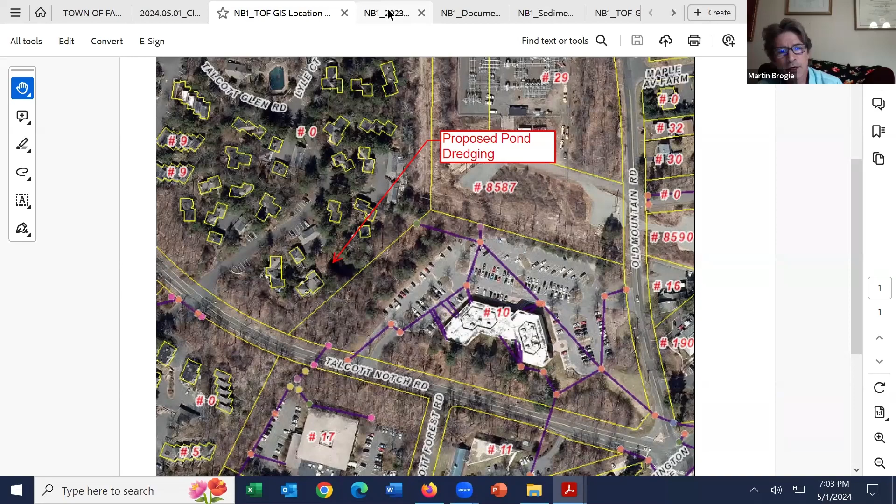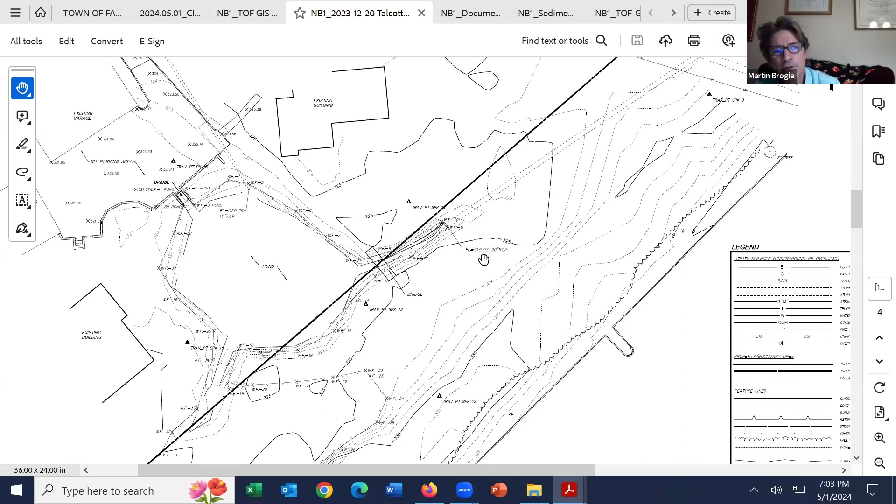And there's been some flooding issues out here, flooding up against a garage to the west, damaged some cars and so forth. Our engineer, Will Walter from Benesch, thinks it's probably an outlet problem. The 30-inch discharge pipe there may have an issue. But the first order of business is to get the pond dredged and to open up the beginning of the outlet culvert at the northeast corner of the pond, and remove the sediment, open up that channel and get things flowing the way that they were designed to. The invert of that 30-inch discharge pipe is not far below the elevation of the pavement in and around the garages. And a little bit of backup there can create that flooding problem.

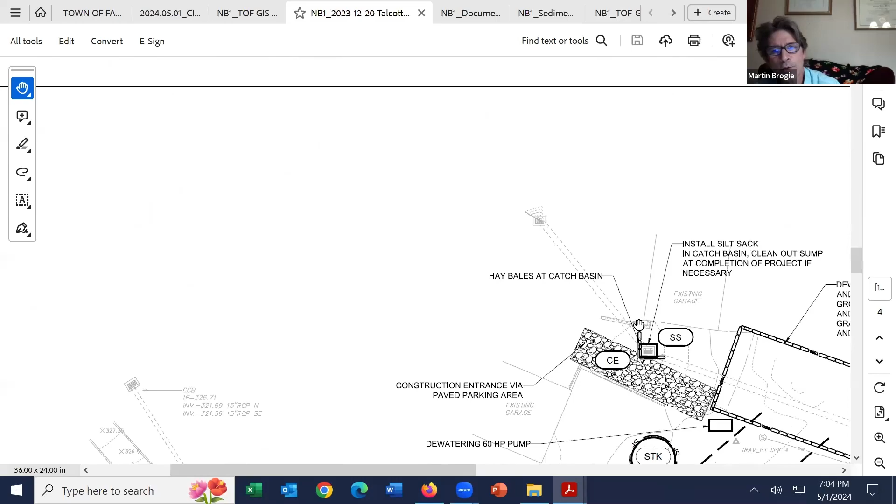So we have Pristine Waters on board. I'm not sure if Mark Aimler's here. He did a pretty extensive presentation last time about how the system would work, including using basically a pumping system that would deliver the sediment to a dewatering bag about 150 feet northeast of the pond in a staging area. That bag would dewater into a containment system, and then the water would get pumped back into the pond as they pump the sediment out. There were some comments from staff as to whether or not that containment system would be large enough given the volume of sediment, but the sediment is actually quite fluffy, as Mark explained, and it will settle down and meet that volume.

And so the plan is to get this done in a low water time, perhaps in July or August, and be very minimally impactful to the pond. Everything is away from the pond other than the inlet hose and the outlet hose, and a small charging barge that would float in the pond to prime the pumps and so forth to keep the suction moving. And then the hoses would be removed. And then the plan is to either reuse the sediment on site, should it be suitable, or dispose of it off-site.

Bruce Sear mentioned to me in the last week or so an issue, and that is the environmental quality of the potential sediment removed from that pond, given the fact that it's received stormwater for a number of years. And certainly it's not uncommon. I've done quite a few dam removal projects where we've worked with DEP and other agencies to evaluate the quality of the sediment to determine whether or not it's suitable for on-site reuse or for disposal off-site. So that's something that wasn't specifically scoped out previously, but we are now planning. I let the client know that we're going to need to do a laboratory analysis of the sediment.

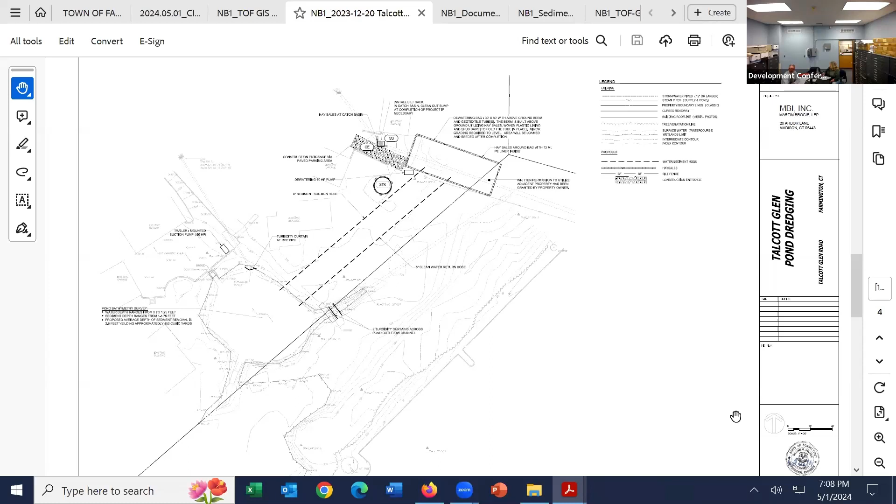Okay, Robert Eisner. Again, did we lose Robert? Yeah, no, he's there. Yeah, I'm still here. All right, gotcha. Can you hear me? Yes, yep. Okay. Do you have any questions? Yes.

Martin, I think a lot of times the RSRs are used as a proxy, but they weren't intended for reuse if contamination is detected. As you know, the remediation standard regulations are safe cleanup standards. But if you do your composite samples and you come up with detectable levels that exceed background, you cannot reuse that at the site unless those contaminant levels already exist at the site. And I would imagine, given the nature of the sediment basin, you probably are going to come up with some detectable levels that may preclude reuse at a residential site. So you're probably going to have to look at an industrial reuse or potentially a landfill capping material.

But just because it meets the RSRs, you're not doing a remediation. You're sampling for determining clean fill versus contaminated fill. I guess I was imagining the scenario of reuse of polluted fill. But I don't imagine that the condos are built on contaminated fill. So you'd be introducing contamination where contamination does not exist. I guess that's an assumption. I guess we could do some background sampling of the property to determine background concentrations. Yep, if you are planning for reuse at the site, then yes, you'd have to determine the background levels at the site as well. Mm-hmm. So, end of my comments. Thank you. Thank you.

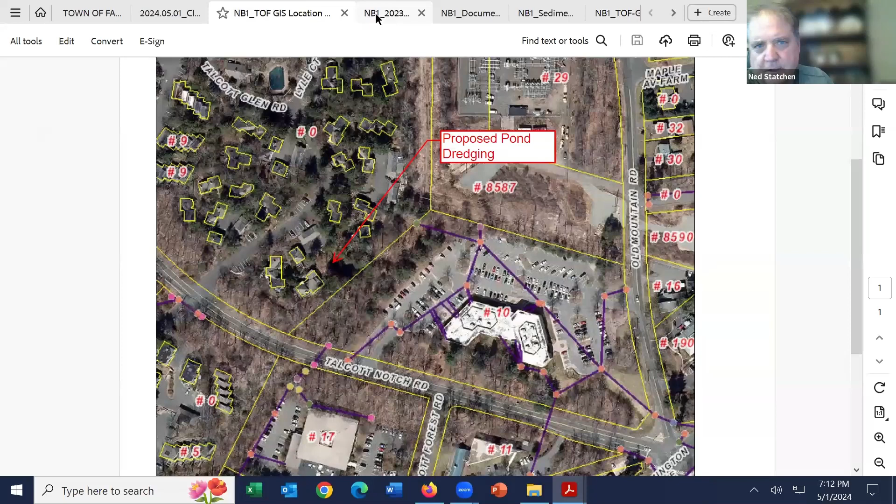And the plan is also to lower the elevation at the outlet area. You had mentioned that the elevation at the outlet is pretty close to the elevation of some of the garage locations, and so they wanted to try and get that lower. Is that part of the problem that'll be resolved?

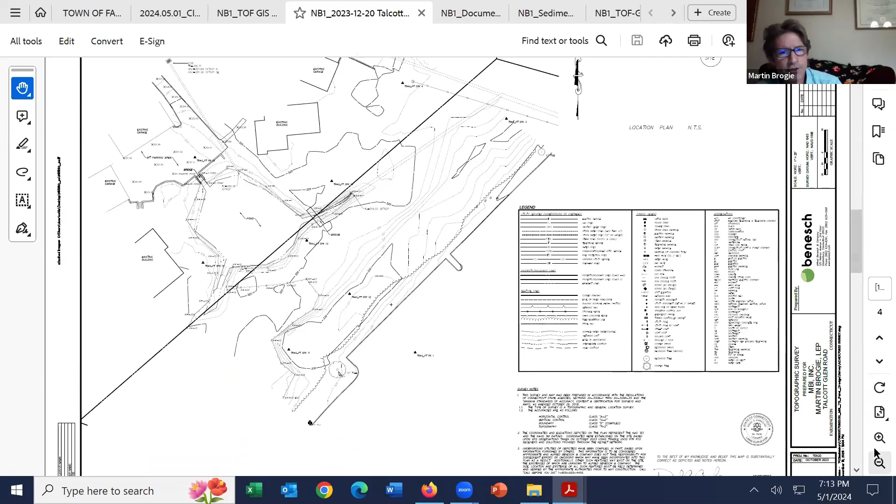Yeah, the invert of the 30-inch discharge pipe, which is the design outlet for the pond, is maybe a foot and a half lower than the parking area. I'm not able to see the elevations exactly right now, but it's not a huge difference. But where we have a constriction is the southwestern end of that culvert. Yeah, right in there, right where that bridge is.

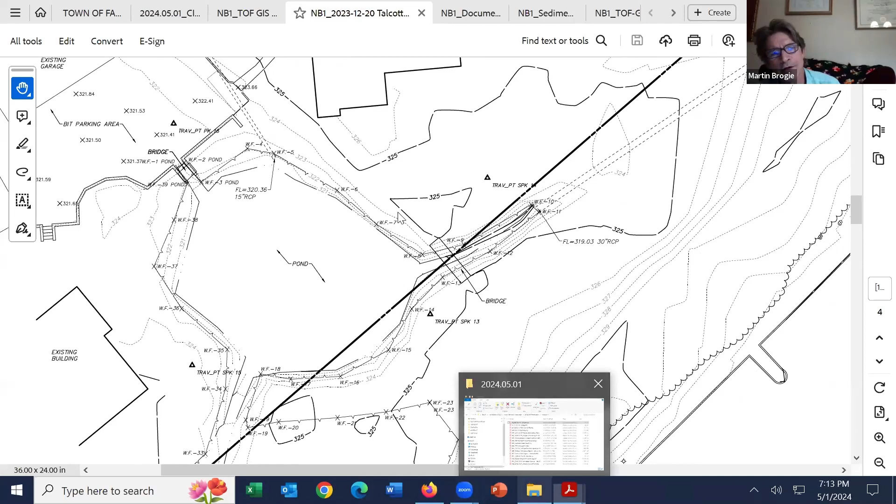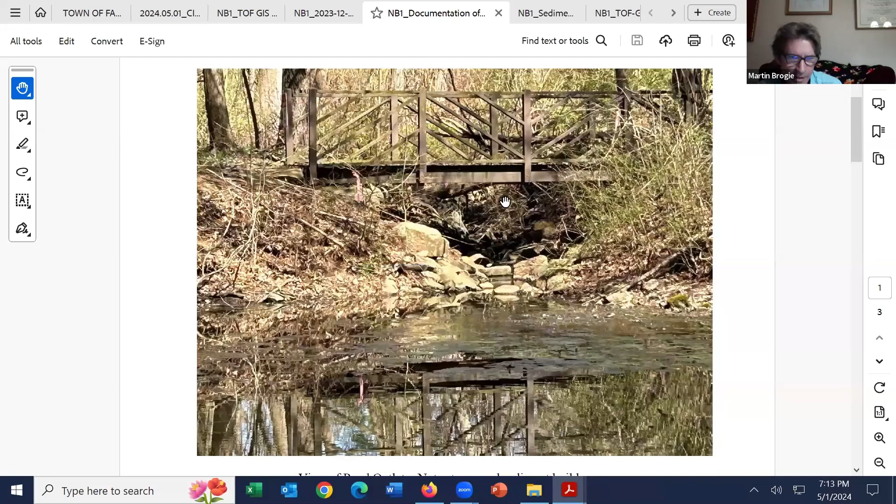I had another document that I'd submitted for the last meeting that included some photographs of that area. There are some cobbles in there, and there's some sediment that has built up. And we plan to remove that sediment and relocate those cobbles and sort of open up that entryway. That's the area there just below the bridge. You can see some of the stones there, and we'll be bringing that down to the design elevation of that ditch that leads back to the invert of the pipe. So that's really where we see the best chance for lowering of the pond outlet, right in there.

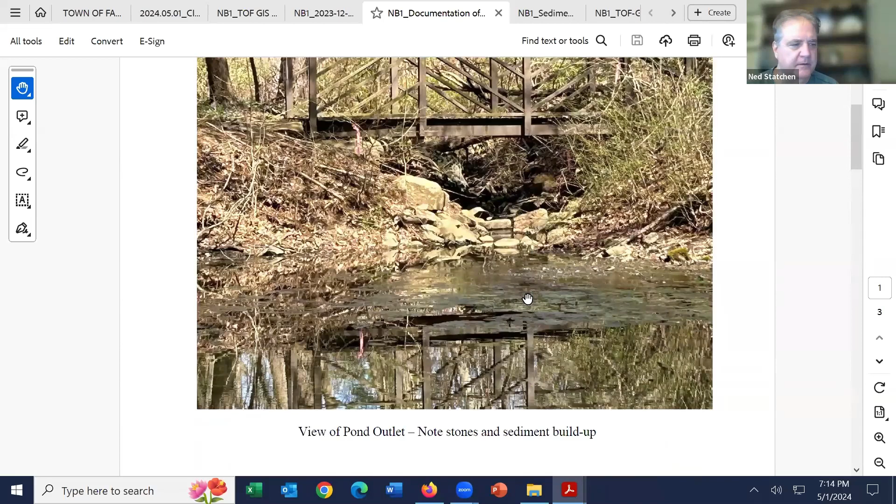Yeah, and some of those photos, it almost looks like kids or whoever were trying to dam up some of this. So that's going to be addressed with moving the rocks and the cobbles for better flow. Yeah, that's all handwork we can do in there. Okay. It's pretty straightforward. All right. That's all I have for questions. Anybody else think of anything?

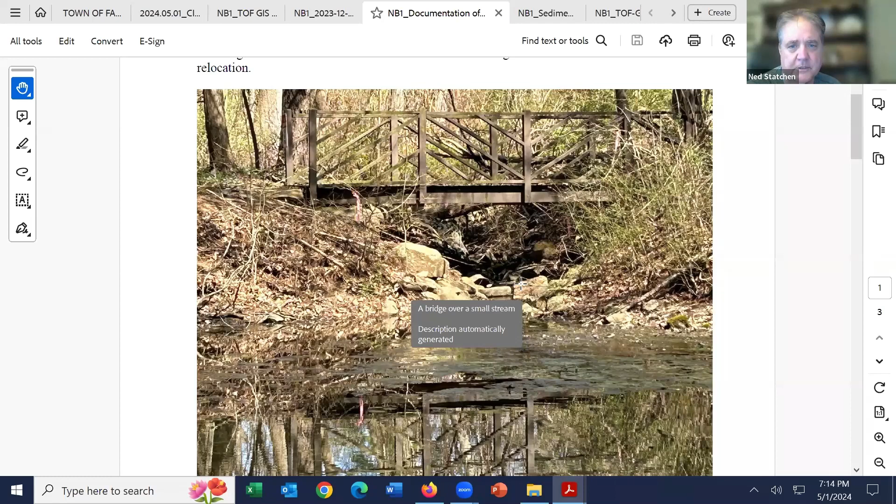Okay, so the first thing we have to do is determine significance. I tend to think that this is just a maintenance operation, and it should greatly improve the operation of the sediment basin, give it more storage area, and hopefully eliminate the damage to vehicles in the parking garage during high flow times. So I don't think it's significant, but I'd like to hear from the commission. What's your opinion on it?

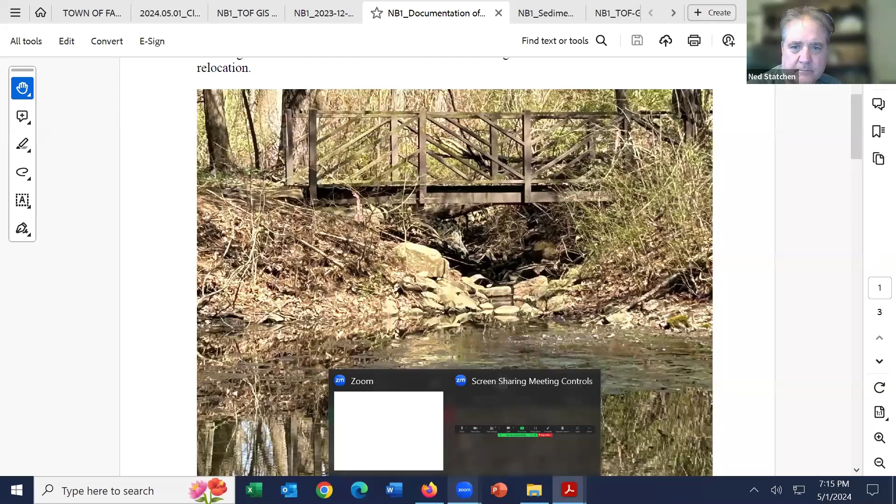We'll start with Dave. I would agree, not significant. Okay, Robert. I agree. It's a non-significant regulated activity. It'll actually have a net benefit when it's done properly. Okay, Neil. Yeah, I concur. Okay, Mark. I agree, no need for a public hearing, since the people who would probably call in and talk about it would be the residents of this community. So it's just a maintenance type of situation.

Thank you. Okay, Rich Berlandy. Yeah, I would agree that's non-significant. Andre Simons. I would also agree that it is not significant. Okay, and George Santos? I also agree with that. Okay. All right, seeing that everybody agrees that it is not significant, the chair will entertain a motion that this is not a significant event and just maintenance.

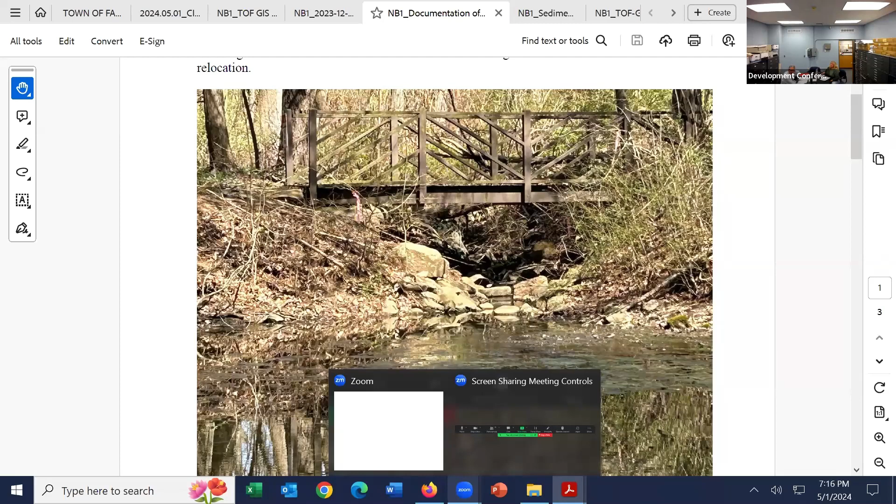So moved, moved by Mark. I'll second. Robert seconds. Okay, motion is made and seconded. All those in favor, say aye. Aye. Aye. Aye. Sorry, who made the motion? I got Robert as the second, but who made the motion? Mark was first. Oh, Mark, okay. Thank you. All right, so we had aye, opposed, abstain. Okay, motion for non-significance passes.

If there aren't any more questions, I will entertain a motion to accept the application. Not to accept it, to approve the application. Are there any further questions before we do that? Okay, can I have a motion to approve the application, please? So moved.

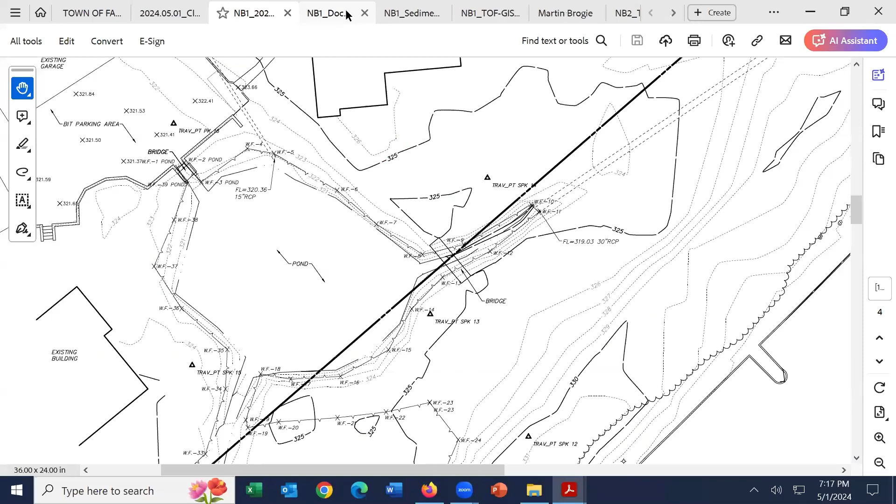Okay. Motion by Andre and a second, second by Robert. Motion is made and seconded to approve the application for Talcott Glen. All those in favor, say aye. Aye. Opposed, abstain. Motion passes. Thank you. Thank you, guys. Appreciate it so much.

Hey, Martin. Hey there, yeah, just do us a favor, just keep us in the loop before we get started. Just give us a heads up on when the work's gonna be done, so we can stop out. Yes, we will. All right, sir. Thank you very much. Have a good night. My pleasure. It's been a pleasure.

Thank you again. And Bruce, yes, I'll extend the same to you. Keep us in the loop because I thought his presentation last week was very interesting. Yeah, that's what I heard, so I'm gonna try and sneak out there and just take a look at the operation. Good. All right, will do. Thank you.

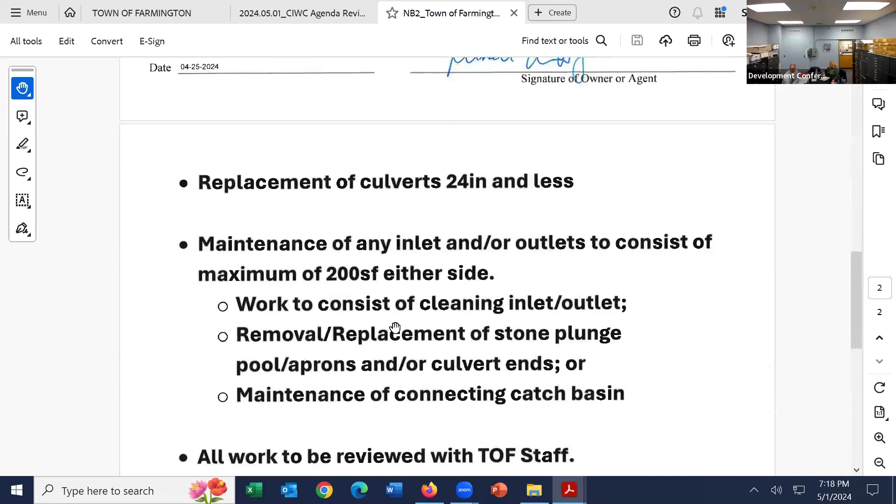Okay, the next item on the agenda is the Town of Farmington General Permit. All right, this is the application. We had spoken a little bit under unfinished business in the past about doing a permit as such. So I pretty much have what we discussed in here with some conditions, replacements of culverts 24 inches and less. Sorry, again, this is for a town-wide permit for the town of Farmington, stormwater maintenance items. So it will be replacement of culverts 24 inches and less.

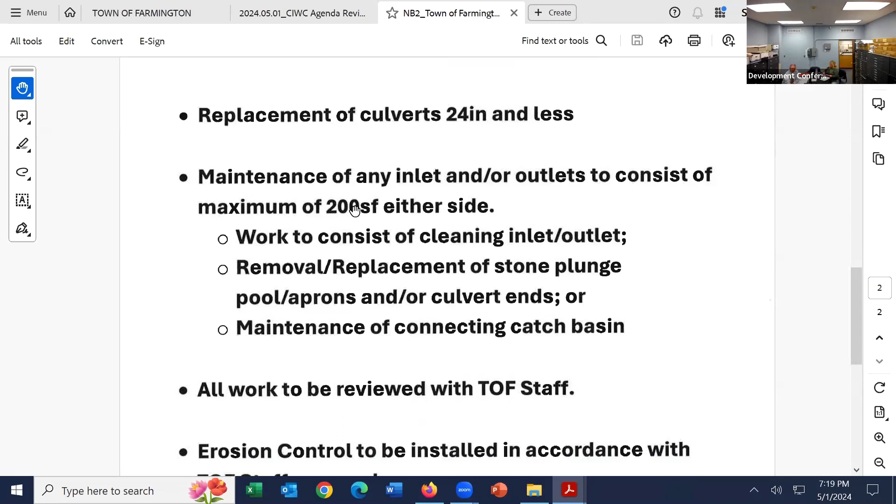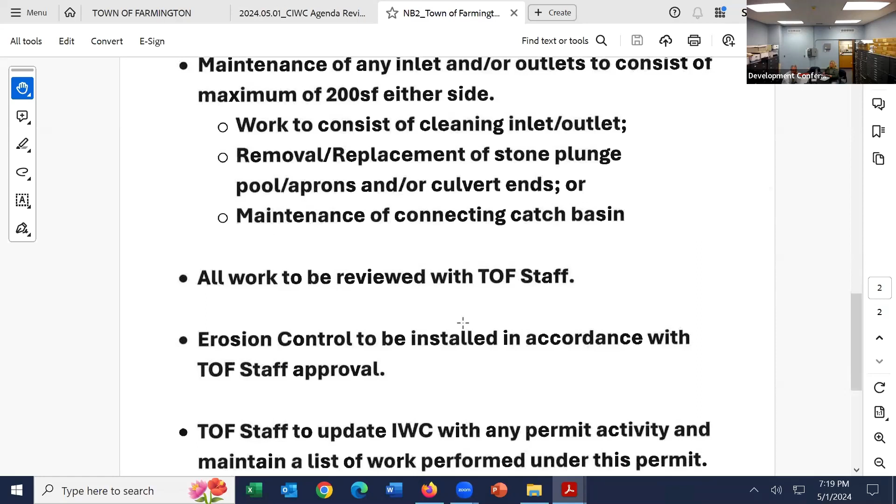Maintenance of any inlet or outlets to consist of a maximum of 200 square feet on each side. The work on these outlets is to consist of cleaning the inlet or outlet, removal or replacement of stone plunge pools, aprons, and or culvert ends, or maintenance of any kind of the connecting catch basins as well. All work is to be reviewed with the town of Farmington staff. Erosion control to be installed in accordance with town of Farmington staff.

And town staff to update the inland wetlands commission with any permit activity and to maintain a list of work performed under this permit. And the permit will be for a 1-year trial and then can come back to the commission for a new permit if the commission does deem fit. Also, permit is for work by town staff only. And just as an FYI, we're talking maybe 6 of these a year is what they're thinking that they do. So I think the intention is for them to come to our office,

say, hey, look, we got a culvert that's blocked up. We need to open it up at such and such location. We're going to take care of it next week. I can stop out, take a look at it, confirm with them what they're doing, work out the erosion control, get the work done, and then I can come back out and document that the work is done. And I know the commission had some concerns with maintaining that, so we'll figure out some kind of a spreadsheet or some sort of a tracking form that we can follow those through.

And what I'll do is I'll keep you guys updated as we go through, as the work is being done. It's not going to be an end of the year thing where I'm just going to give you a whole list. So if we know something is going on, I'll give you guys a heads up. So, all right.

Yeah, all right, so a couple questions I have. When we say replacements of culverts 24 inches or less, I know the usual problem is sometimes the end section of a culvert, especially if you don't have a big head wall, will kind of dislodge and start to get some settlement on it, and then if the joint opens up, you get water running underneath it. But if you were to do, like, 200 feet of a 24-inch pipe, then I think that might be a different case.

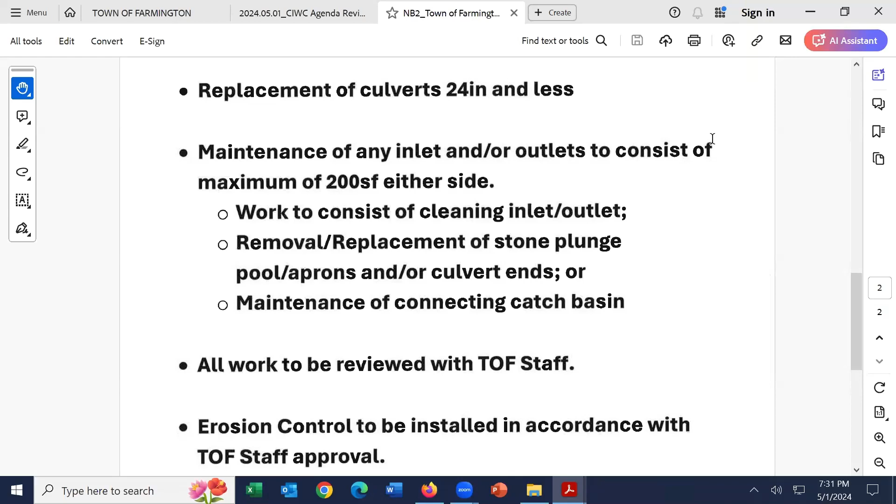I'll entertain a motion to accept the application from the town. So moved. Okay. Second by Mark. Okay, motion's been made and seconded. All those in favor say aye. Aye. Aye. Aye. Opposed? Abstain? Okay, thank you. Motion passes.

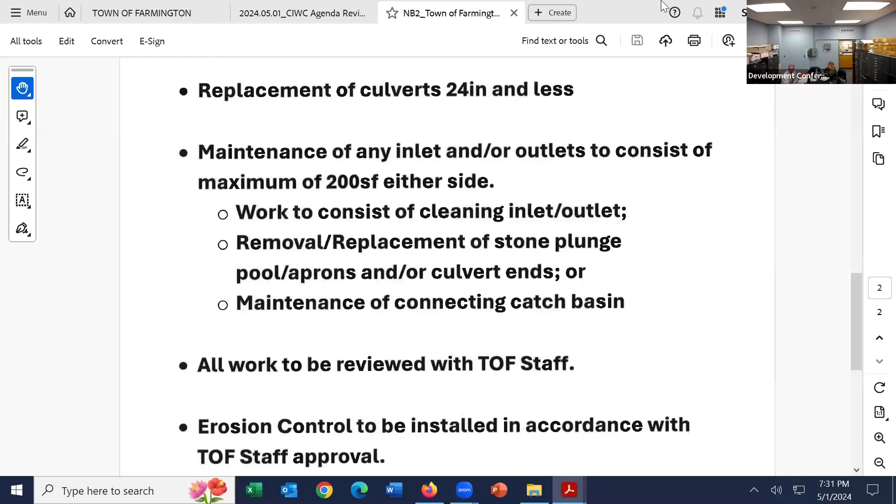Thank you. And what's the next? The cease and desist. Okay, cease and desist, and nothing changed at this point. All right, I will keep you informed as we get closer to scheduling hearings and having that going. Okay.

So I think Commissioner Kelsey had said that he was talking to some of the firemen, and I guess it was hampering their attack of the fire. Yeah, that's what I heard. So have we approved the pool there? I came in only at the point of the cease and desist stuff. So was there a hole approved where it now is?

Oh, yeah, sorry, I apologize. I thought you were here for that full application. Yes, he did get approval for the pool and the garage. Okay, all right, and that's what that was. I came in when the 186 trees came down; that was like the next day. Okay, so that's what it was.

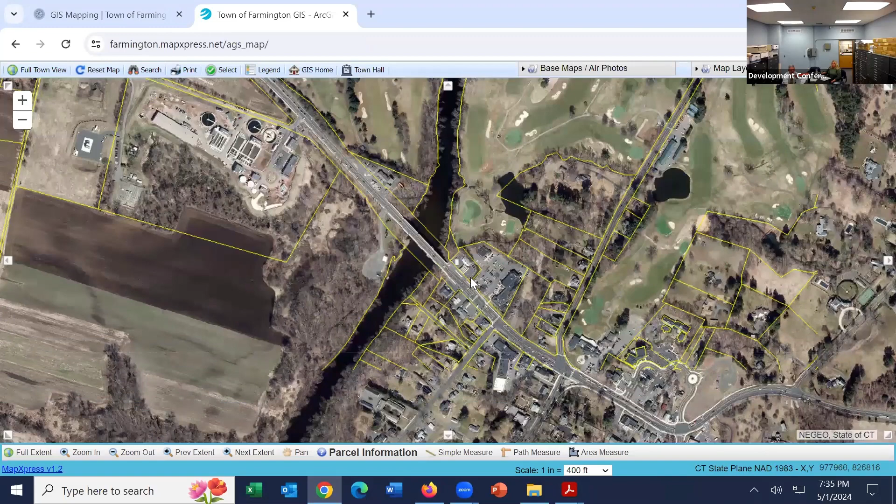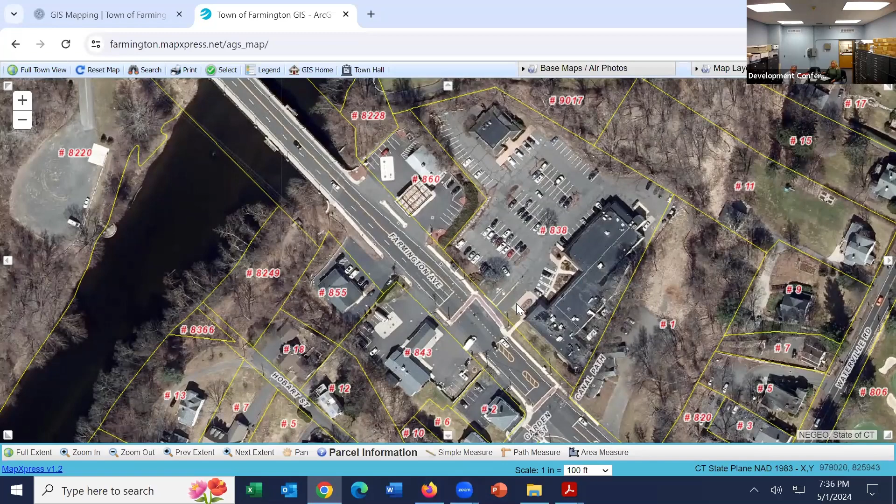So here's the Naples Pizza here. M&R Liquors is here. Fork and Fire is in here. David the Jewelers is in there as well. So the applicant had come in with planning and zoning and is proposing some improvements to the site. Let me jump back to those plans. As part of the plan,

this is a mixture of sidewalk and some planting beds, and they're all pretty much outdated and overgrown, so what the applicant's looking to do is some facade improvements and clean up and organize the site a little bit better.

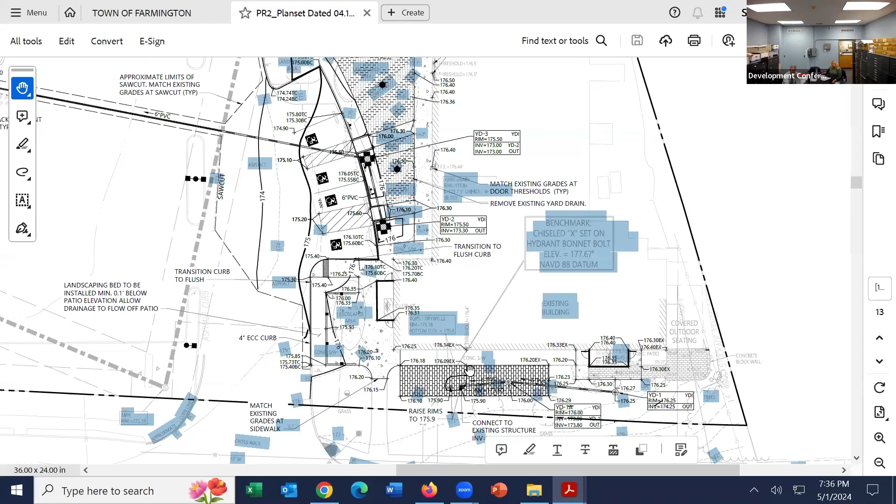As part of it, he's looking to do patio areas out here, and he was proposing to do one out here as well. As we got through the plan, we ended up asking them to withdraw this portion here of brick, and to reduce this portion of patio as well, and to increase the landscaping area in front of the Starbucks in here.

So what they're looking to do here is a permeable paver. The best I can describe it is if anyone's been up at the Rebel Dog at 5 Corners, the sidewalks they have there are a pervious paver. Usually it's an impervious paver, meaning it's like pavement. Water hits it, runs off, and becomes a stormwater runoff problem. With a pervious paver, you'll have a bigger joint in between the bricks, and it's filled with stone.

It's not filled with sand. And underneath it, you'll have anywhere from 12 to 18 inches to 2 feet of a clean washed stone. So the intention is for that water to hit that pavement or hit those bricks and go right into the underlying soil and then infiltrate. So it's definitely a plus. It's reducing impervious areas, and that's what they're looking to do here.

Okay. These are going to be some rain gardens here. So they're going to plant these with some rain gardens and some overflow pipes or drains. There'll be one here, and they're going to add one here as well. Okay. So with that, they're going to clean up these sidewalks all along the front. And this is gone. They will not have this on there.

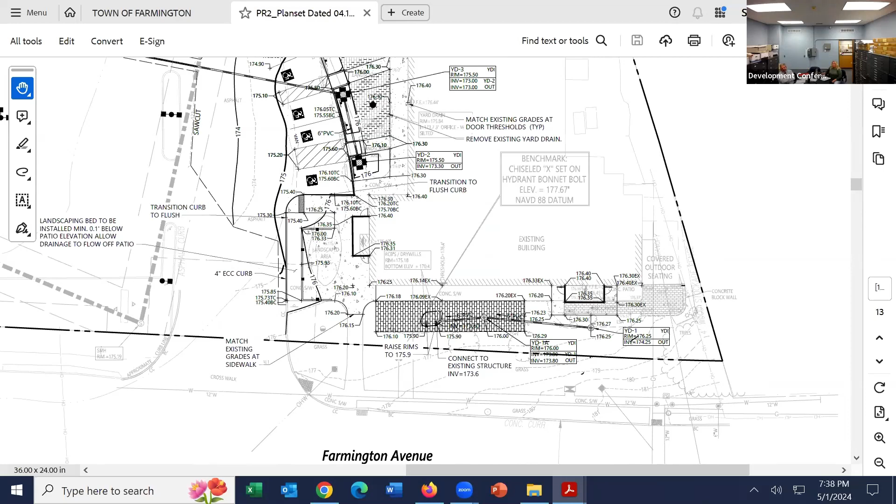And there's 2 existing dry wells here right now. So that's a plus. Those are taking water from, if you're familiar with the area, here's Route 4. It drains down into the building and it's a low point in the grass area. There's a couple of dry wells that are functioning to this day. Every time we've been by there in a storm, I've never seen that area underwater. As part of the plan, we've asked them to inspect them, clean them as needed, and replace them if needed.

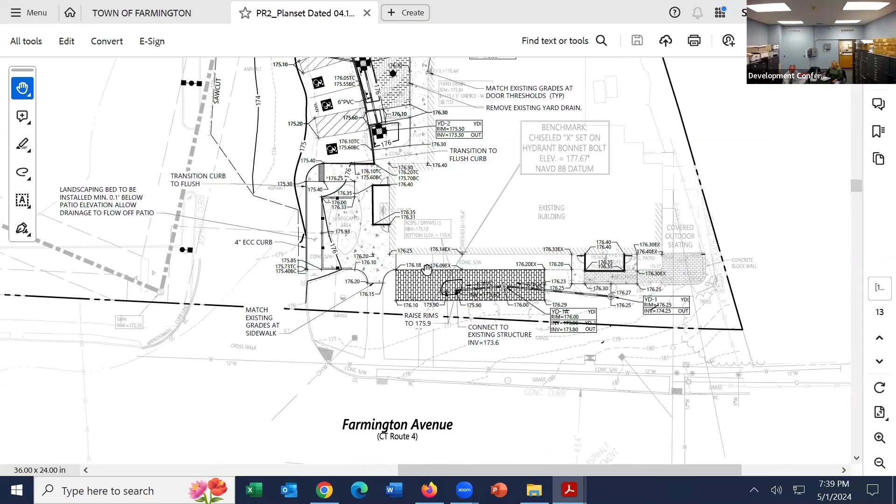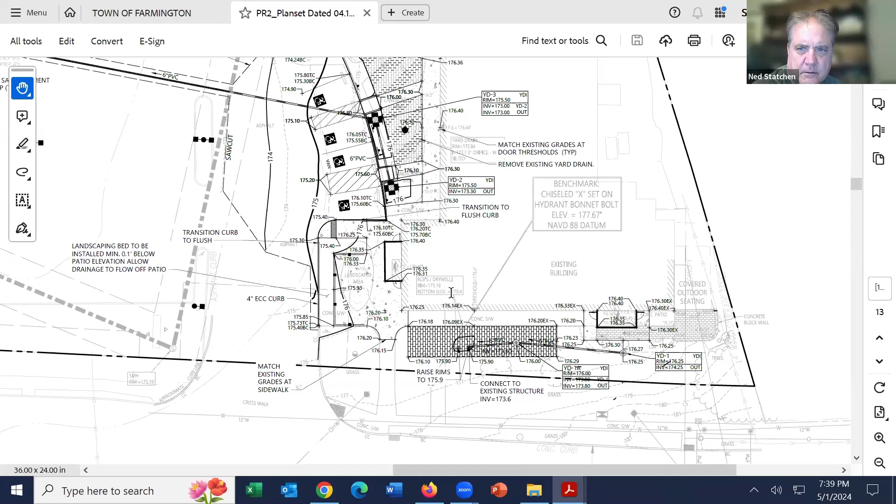All right, and yes. What was the problem with the pavers, and was that also going to be pervious pavers? Well, yeah, this was going to be pervious pavers too, but this is a different planning. This has to do with outdoor dining. The area of pavers was getting too large, was able to support too large of an outdoor dining condition. So when we have too much outdoor dining with the indoor dining, the parking was not able to sustain that. So we're working with them to reduce these areas so the outdoor dining as well as the indoor dining will work, and we won't have a parking problem out there.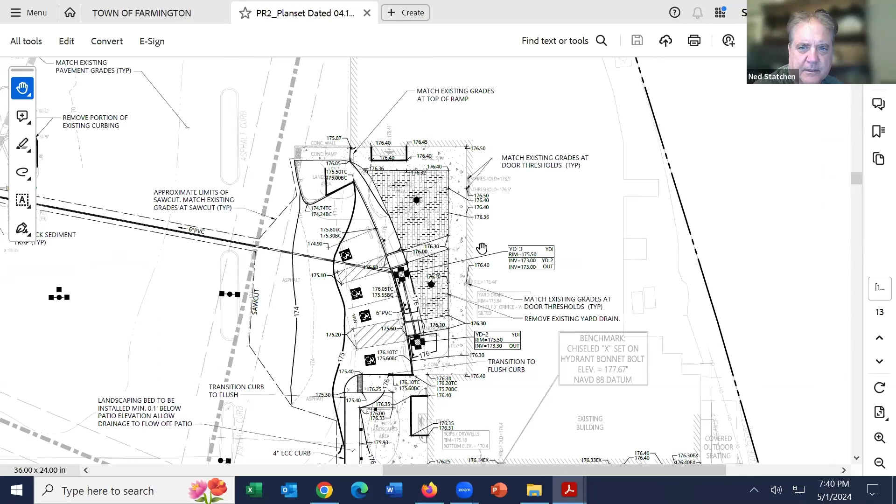So all right. So this will go away. He has an existing outdoor dining area in here. He has some seating in the back there. And like I said, he's got some seating along here. So just to formalize that in a smaller area, of course, we've asked to get rid of this and to reduce this area as well. So again, we have a parking count, which dictates a seating count. So that's how we're working with them to keep this sized appropriately.

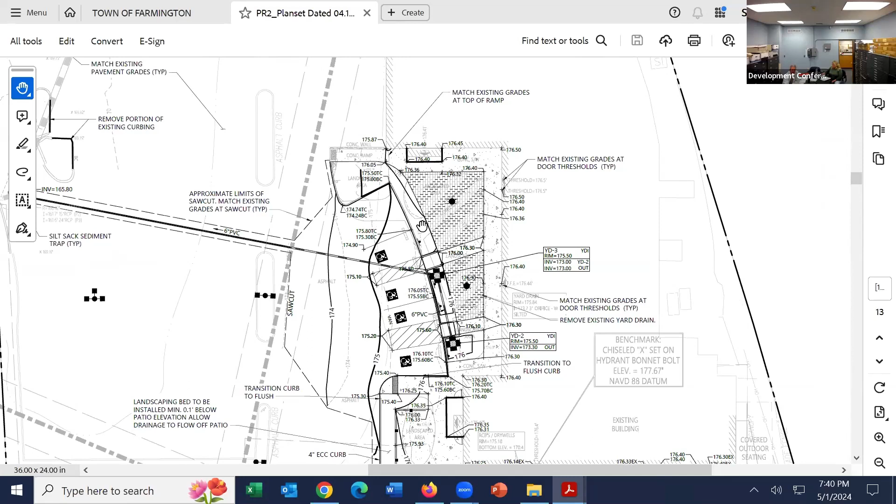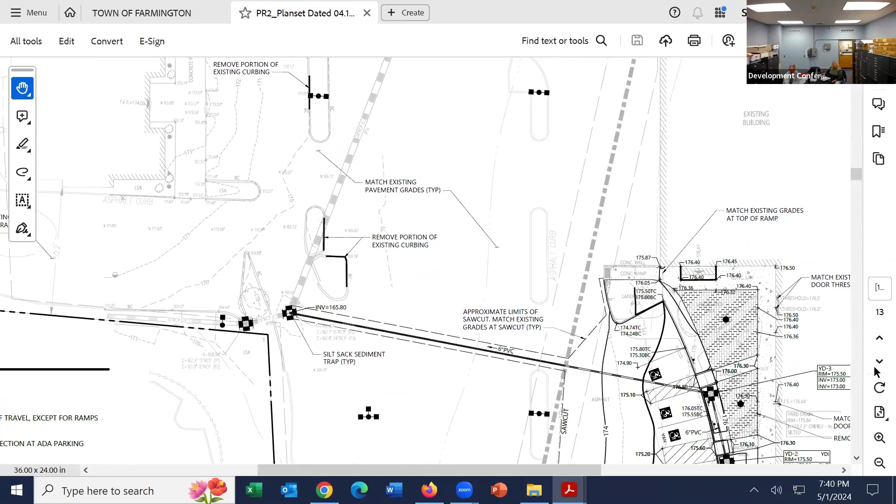All right. Everything else is going to be a pure maintenance item. The entire parking lot is in some poor shape. So they'll be looking to mill and pave it. They're not doing much in terms of excavation. What they're going to do is, we've asked them to do this, and they're going to address it here. Let's see, do I have a better picture? Here we go.

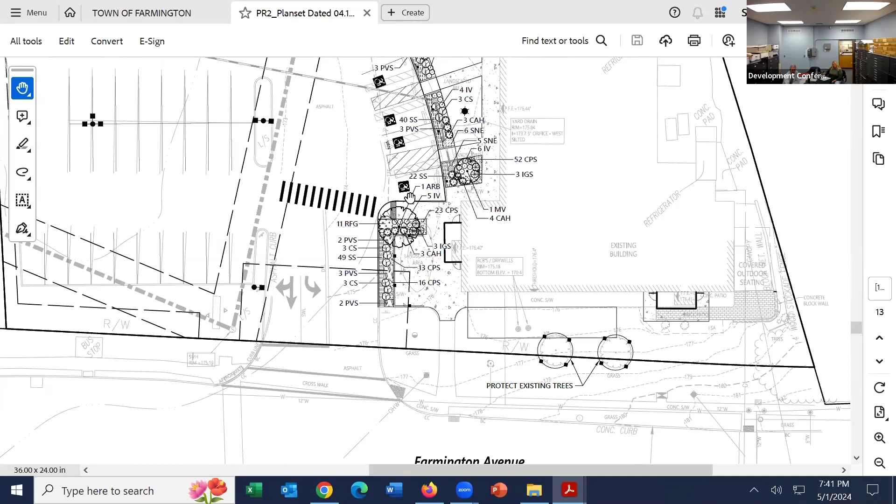So again, here's Farmington Avenue. All right, here's the Maple side of the building. So this is their proposed concrete. We've asked them to bring this out even further out into here with more landscaping. So here's the rain gardens here. We've asked them to get rid of this and to reduce this area here. And we've also asked them to do rain gardens in these two lower islands as well. Those are planted right now with just some mulch in them.

So they've agreed to do a rain garden type situation on both of these with a high level overflow with a yard drain that'll be sticking up like a foot or so out of the bottom of the basin to collect any of the heavier flows during a larger rainstorm. So we're not washing any of the mulch or plantings out across the parking lot and causing a mess. And those will be tied into the storm drainage pipe.

So now getting back to the storm drainage system, this whole parking lot here drains out to this and drains out to the river. And then there's a drain out back and that drains out to the river as well. Now, both of those are fairly old. Those were all built originally when this was built. And don't quote me, I want to say it was the late 70s, early 80s. All right. So in terms of wetland permit, it's just a mill and overlay, so this is more of an informational thing.

I wanted to just bring this in front of the commission for their review and garner their support of whether we can just do this under a planner's report, because it is just a mill and pave. They're not reconstructing or adding parking. They're not moving parking lot lines or anything. So it's just a simple mill the existing pavement, pave new, and just put all these islands back.

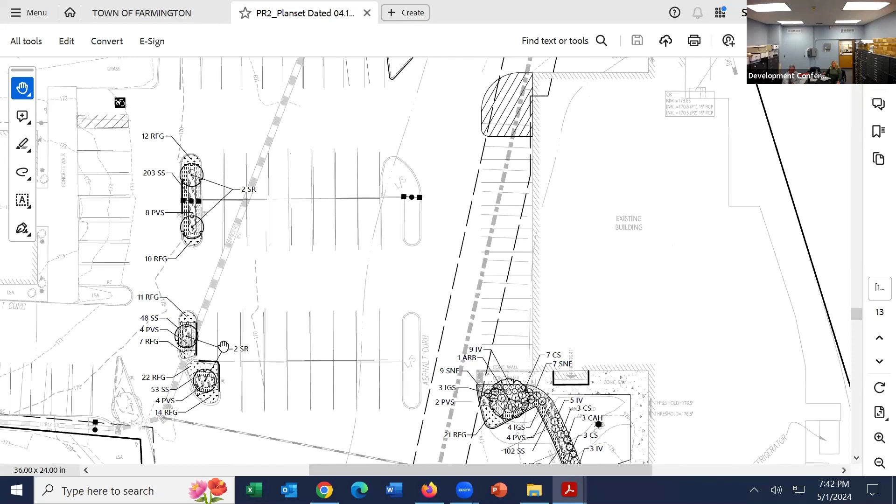They're just improving these conditions here by adding rain gardens here and here. So it's definitely going to be a water quality benefit with the rain gardens. The pervious pavers will actually reduce the total impervious area from today on the site. And as well, we've asked them to address some water quality at these two catch basins.

So we're talking maybe deep. Their engineers are looking at it now, either going to be a deep sump with hoods, or just hoods, or using a newer product, which is a catch basin insert. If anyone's familiar, they're like a silt sack. So you'd open up the grate, drop the sack in there, and drop the grate back in. What it does is it collects sediment. It's like a big filter bag that hangs in there. It collects sediment, and it helps filter out hydrocarbons as well.

So there are some concerns about adding anything on this embankment here, like a new structure, because of how steep this is. It doesn't show very well here, but it's very steep. We definitely do not want to be touching that catch basin because it's going to disturb that embankment, and we may not get that embankment stabilized again for quite some time.

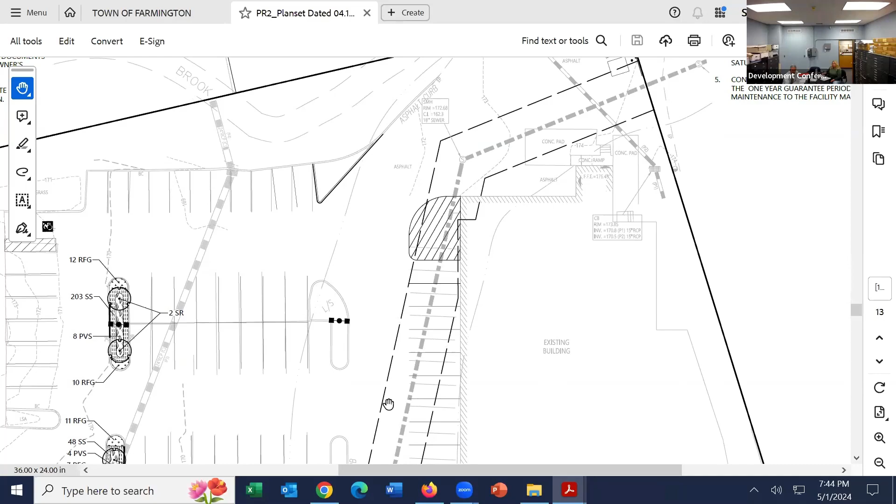What's that triangle there? Right, this is just an existing curb out here, and that's just going to be like a no parking space. So that area won't be paved anymore, and it's paved now? No, the existing lines, let me jump back over here. You can see right now the existing pavement lines run right along here. They're really not changing any of these. I assume you've been in the parking lot. You can see from the aerial too. It's failing worse than what you may see here. So it's been a project in the works for quite a while.

As I said, all of this area is outside of the 150-foot upland review, but because it flows through the catch basin to the storm, I just wanted to bring it to your attention and let everyone know. The application is with zoning right now for the approval of the facade improvements as well as the patio areas. So if it does get approved, I don't want you guys to see some work going on out there without knowledge of it. So again, looking for a consensus that since it is a simple mill and overlay, it is something that we don't need a permit for.

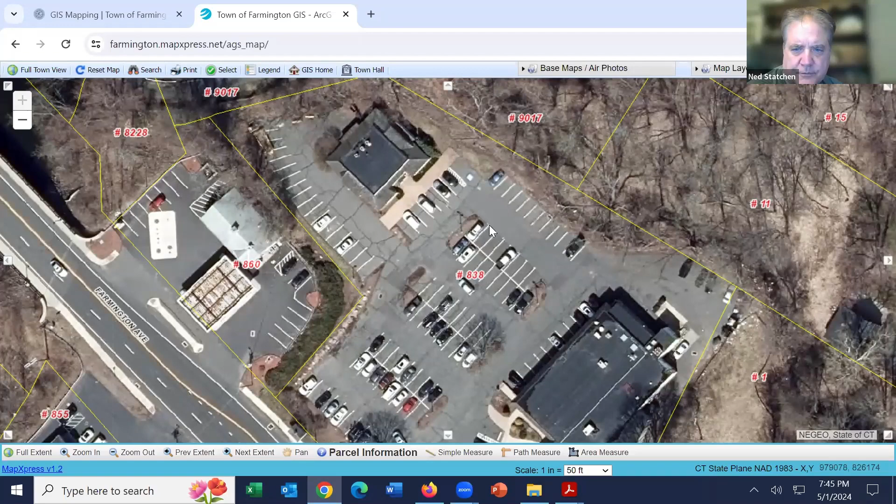Yeah, I'm looking at it as maintenance. Those two islands that are closer to the buildings, will the one with a tree in it stay? Yep. Like I said, the site's in some pretty poor shape. I think this is the only island with a tree left in it. The landscape plan will have all full trees back in here.

The lights, they're adding a couple lights, I think one here, and we've asked for one light here, because this is where a major crossing is. These two spots are where people use it the most, so when people come in here at night, they can see the pedestrians coming through the parking lot.

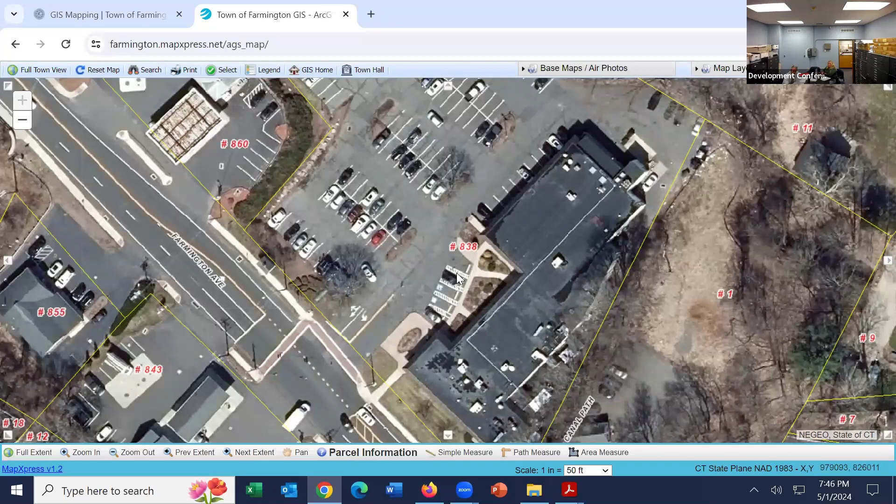As I said, it is just a mill and pave to clean up the parking lot. Most of the items that we're doing are up here outside of the 150-foot upland review. However, with that in mind, we did push and we got them to include many of these water quality improvements, which will definitely benefit the site as a whole.

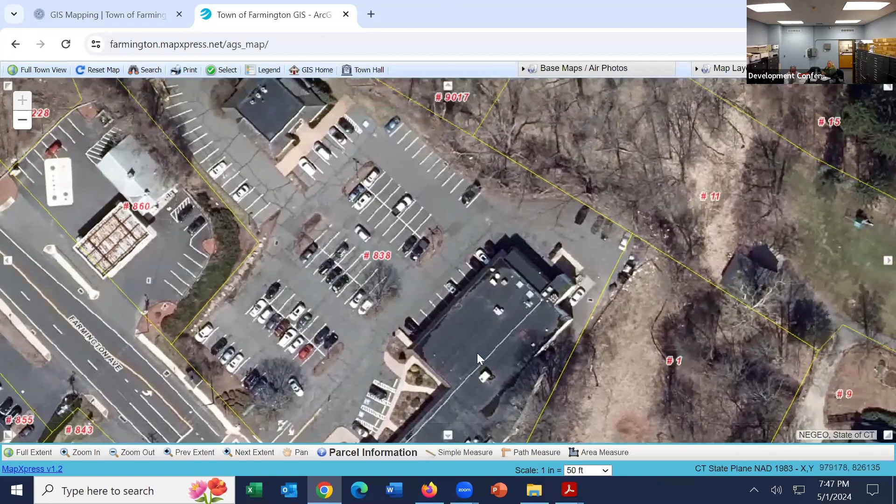Where approximately is the 150-foot mark? Because the stream's in the back there, right? Yeah, right through here. You're not close enough to the Farmington River for any of this to be in there, right? No, it's okay, it's all out here.

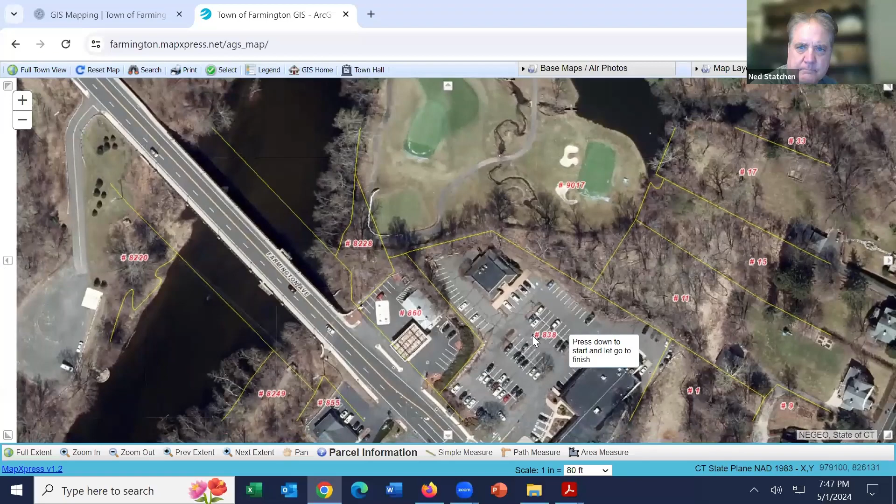Yeah, that little brook there that goes next to the golf course. So all this, see, that's all 209 feet. The patio area is all like 209. But if you see, where does 150 take me? Yeah, 150 will take me back to the second island here. All right. So it's something like this. So all of this area is an upland review area. Everything up in here is outside of the upland review area.

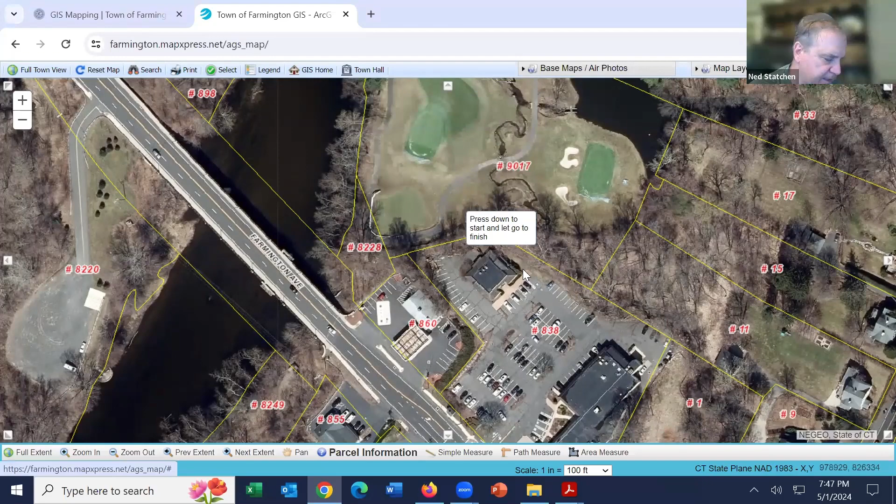Okay. Yeah, I mean, I'll open it up to the commission on anything, but I don't see the need for a permit. I think this is mill and pave work. Agree, it's routine maintenance. Anybody else have a comment? Okay. Do you want to vote, Bruce? If you don't mind, just to close it out, it'd be great, that way we can say, hey, everyone was in approval of this.

All right, the chair will entertain a motion that the work was introduced to the commission with approximate locations of the 150-foot lines, and the commission deemed it to be maintenance work in the area and not a large change of the property. So moved by Isner. Mark, I have a question. Okay, a motion's been made by Isner, a second? Oh, I think Mark's making a comment.

My question, is this something we've done in the past? If somebody doesn't do an application, we make a vote? How do we vote on something that hasn't been submitted to us? That's the only question I have. Good question, good point. You're hearing nobody saying that this shouldn't be done. But I just don't know if we should vote on something that has not been submitted to us first. I think that's an excellent point, Mark.

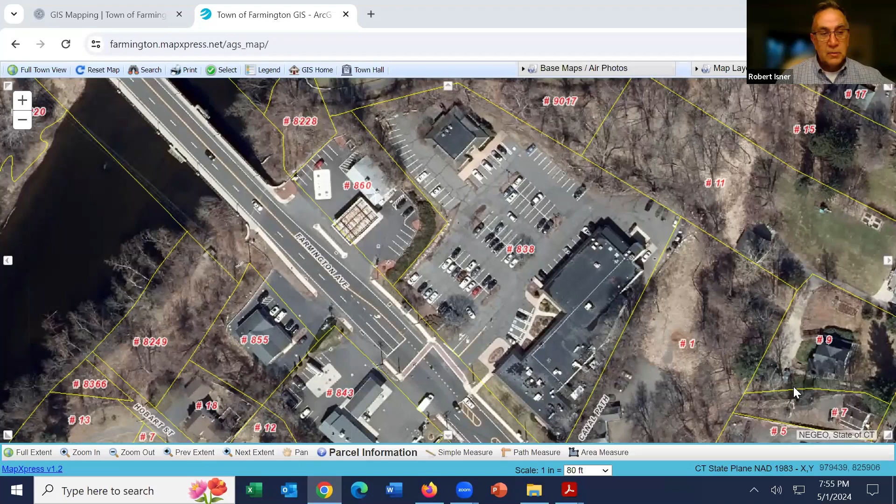Okay. Yeah, I had some discussions with him because that was my concern, what's in that material. So he said he would bring it up for discussion tonight. So thank you for helping us with that as well, filling in the blanks. Thanks for the opportunity to talk.

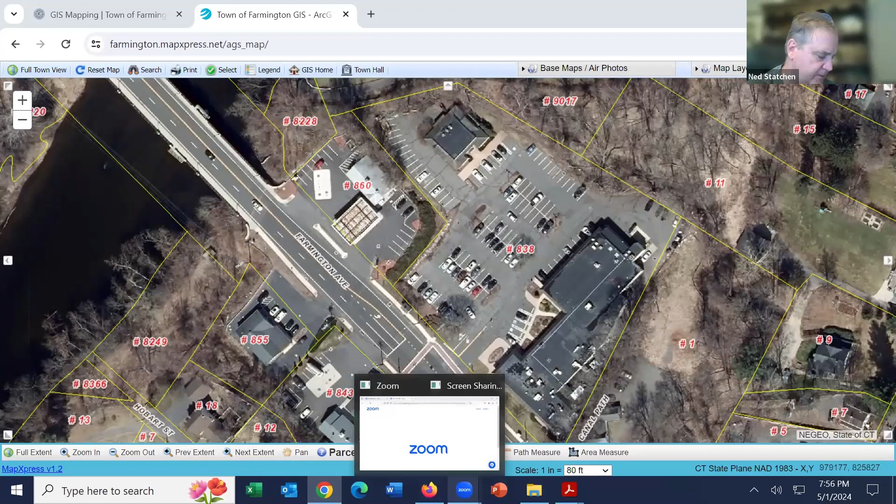All right. Okay, moving on to the minutes. Chair will entertain a motion to approve the minutes of April 17th, the Inland Wetlands Commission. Somebody, anybody? This is Rich, so moved. Okay, and a second? Second, Mark. Okay, motion's been made and seconded to approve the minutes. All those in favor say aye. Aye. Aye. Aye. Opposed? Abstain? Okay. Motion passes. We will adjourn inland wetlands at 7:56 and open up the conservation agenda at 7:56.

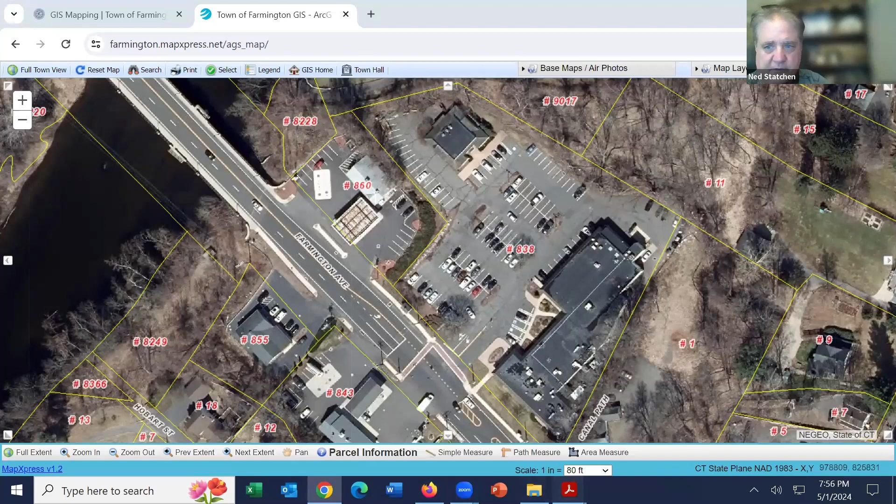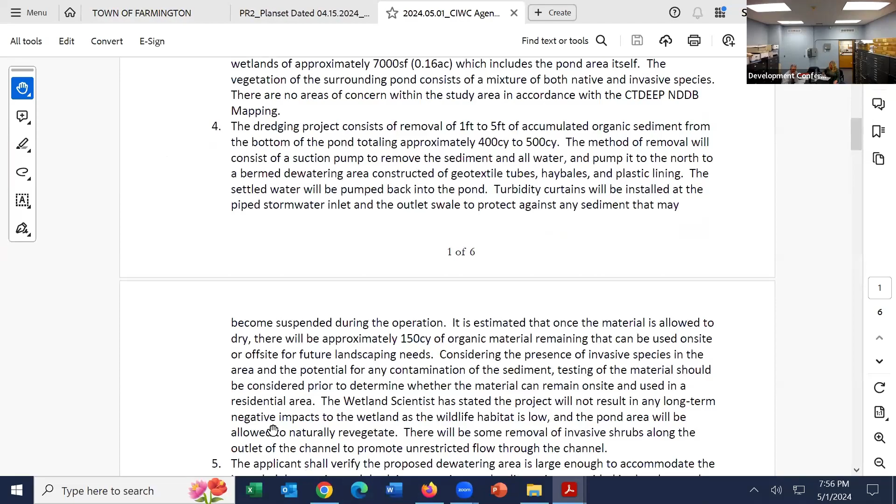New business, household hazardous waste collection. Yes. You scoot down here, just bring up the totals. Oh, where'd it go? Oh, I think I accidentally closed it. Agenda review. I put the totals in the agenda review report just to give everyone an update. All right. There we go.

So total vehicles received was 802 for a total waste collected of 20,000 pounds. Shredding was 9,000. And then we had the townwide cleanup and all the collection stations that totaled roughly 4,600 pounds. Very good. All right. Townwide cleanup, oh, that's part of it. Yeah, I apologize. That's all under the same.

I'll just add that I went to the annual meeting of the land trust, Farmington Land Trust, because I was informed that I'm a member of that as chair of the inland wetlands. So I did go to their annual meeting and met a lot of the people there, and it seems like a great organization. They do a lot of good work and I look forward to working with them. That's all I got.

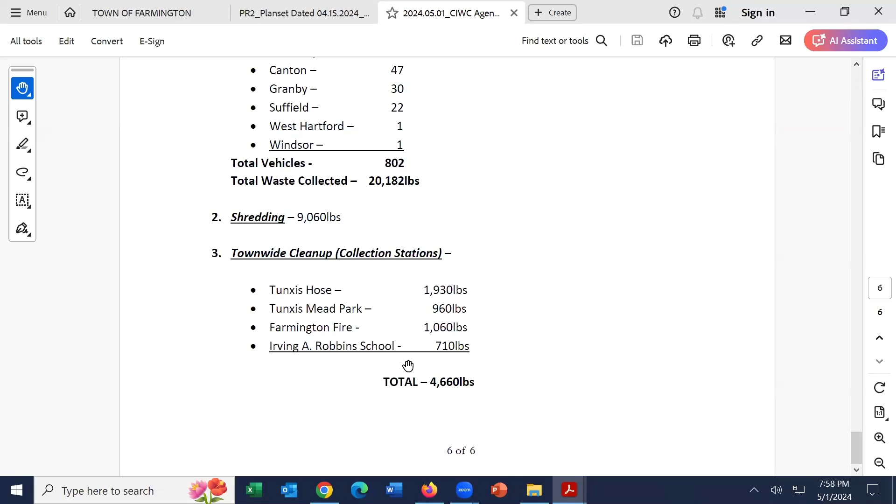Nothing else in the planner's report, Bruce? Nope, that's all I had. Okay, that's all I got. Anybody else have anything for conservation? All right, seeing none, chair will entertain a motion to approve the minutes of April 17th. So moved, Mark. Second, Rich. Okay, motion made and seconded. All those in favor say aye. Aye. Aye. Opposed, abstain, motion passes. And with that, we're adjourned.